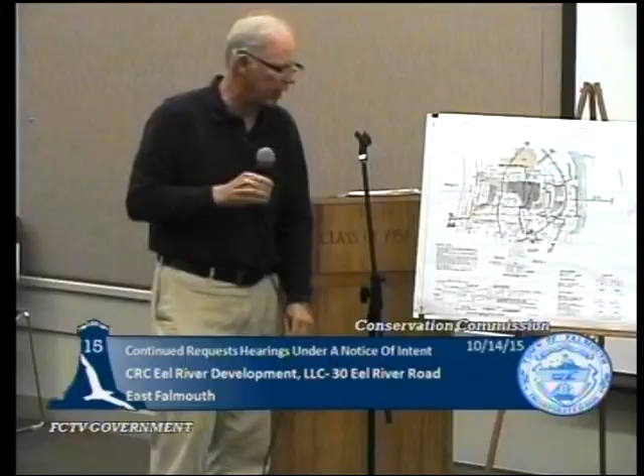I know that Mary, by the way, I'm Jeff Ryther with BSS Design, representing the applicant. Mary had asked me, or made a suggestion, about could that house be moved forward or brought to the road. I guess it could be, but we didn't want to really compete exactly with the house next door.

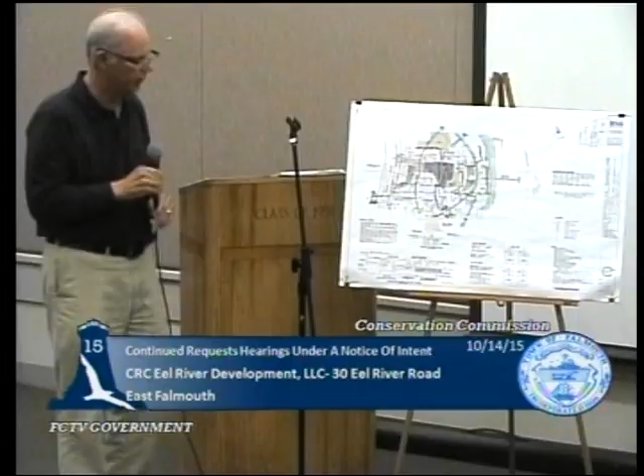As I mentioned before, we're moving that house an entire existing house width, so about 30 feet. We're moving the house towards the road already. I thought that was a pretty good improvement, but I would like to just go over what Jennifer just described.

The coastal bank is one of these coastal banks where you have to apply the 10-to-1 pitch because it's in a flood zone, so it has these little tags that make an awkward little top of coastal bank. But when you offset that, you're offsetting really from these farthest points. So this is the A, the 50-foot, even though it's much more than 50, but 50 at the minimum. And then the next 50 for your A and B buffers.

So what we did is we recalculated the mitigation, and it comes out very similar because now the entire existing house is in the A buffer, but only half the proposed house is in the A buffer. And there is some driveway here that gives credit to the calculation as well. So even though we moved the line 30 feet closer to the road, the calculation is very similar.

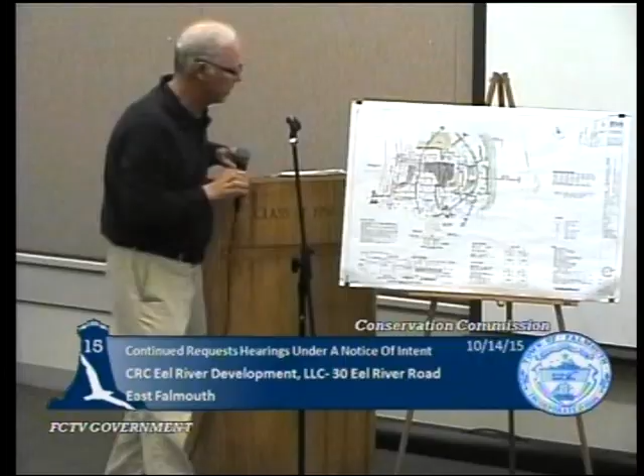There are 4 linden trees that we were proposing to take out right across there, near the limit of work. You'll see them if you look close. Those are no longer to be removed. There's a mimosa tree, I relabeled that, and that is to be removed, and that's down in here.

We talked about the circles around the trees for the buffer shrubs. There was a call out for an existing boat winch that got removed. The owner took it out. It had rotted away, the wood connection, so he didn't need that anyway at the moment.

Talked about the marsh at the ramp. This isn't to be used by anything but smaller boats, such as a skiff, a dinghy, or perhaps a canoe. So there's not a need for backing down big vehicles. This is just access because there's riprap across here, so it leaves a nice opening to get down into the water there.

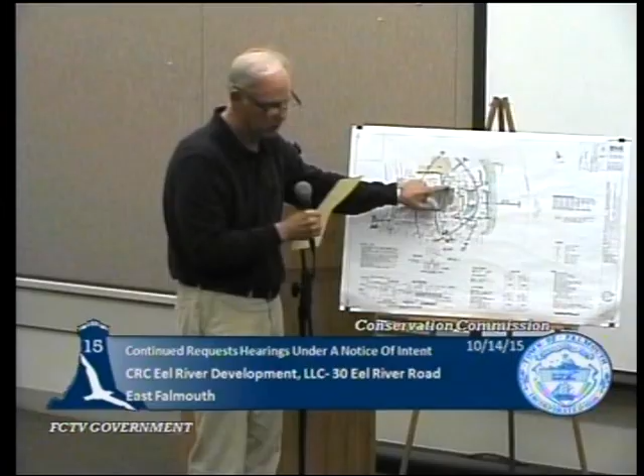We talked about leaving these oak trees. We did have some oak trees that come out in here, and those are no longer to be removed, except there was one oak that we talked about that was going to be too close to the building to save, so we have one there in the A buffer coming out. We were going to continue to the 14th. Here we are today. We just talked about the double oak

and the stone riprap. You asked me to look into the stone riprap for whatever I could find. I did come across 2 documents on the stone riprap.

Back in '73, I don't believe there was a commission like there is today, but the selectmen have the same wetland hearing today as they did in '73. So this is the selectmen's permit.

You can pass it down, or you want it? Well, I want it for the record, but you can pass it down. I have 2 of them. I'll put this in the record and we'll pass that one down. All right, so one down to go to Jen. There's a selectmen's permit for the riprap.

The next page is the applicant back in the day, in '73, had filed with the Division of Waterways, basically asking, do I need a license or not? And their response was, well, the riprap is being built landward of the mean high water, out of jurisdiction, so no, it does not need a Chapter 91 license. So that's the second page of what you got there in your packet.

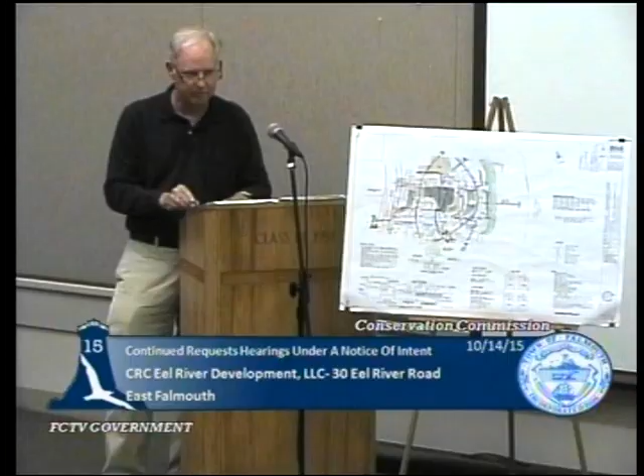All right. Questions or comments? Jen, you got Jeff, something? Do you have that little color-coded schematic? I can give you the last, are you looking for last? No, remember you said I asked you if you were going to bring the color-coded, the little, oh, you don't have like a little 11 by 17? Okay, question. Your AC, no, that's okay.

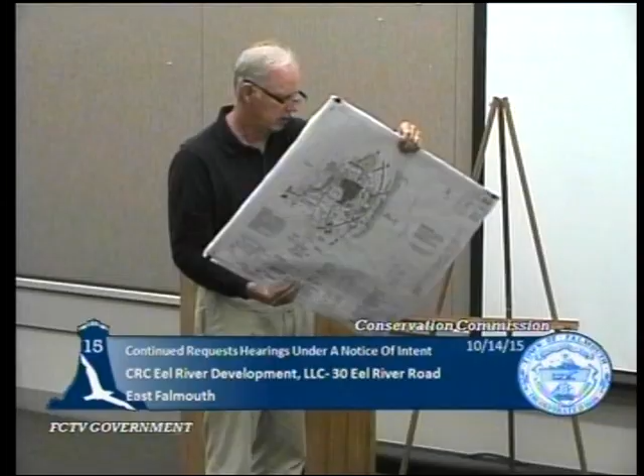Your AC units, were those calculated into your proposed planting? We're going to have to add those in, okay? It only comes up to another 96 square feet of planting. I'm not sure, I think I actually did, but I just moved it into the house. Okay, because they're not shaded, so that's why I asked. Yeah, they're not shaded, but just double check that for me.

Okay. Plus, I am quite a bit over, close to 200, 300 square feet over. Okay, that's the old plan. No, you're about 200. Yeah, a good 200 or so. Okay, over in planting. All right.

And your wall, does it touch mean high water now? No. Okay, good. It comes close over near the boat ramp, but right through here you'll see mean high water, or MHW. Okay, and you can confirm that also on the dock project, it's the same line, okay, it has more elevation.

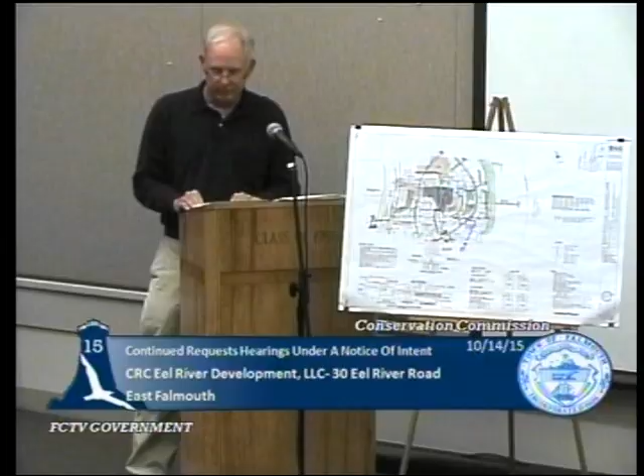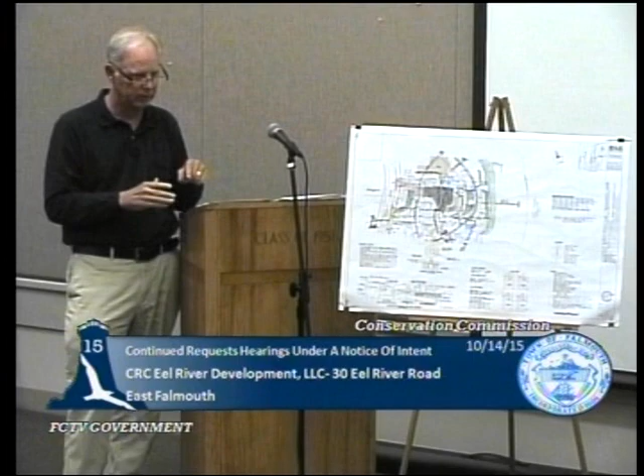Jen? I'm all set. Nancy, anything else? Yeah, well, the other question I had is the tree that you do have to take down, are you mitigating for that? Yes, just so you know, on the seaward side of the existing house, there are over 30 trees that are remaining. And then we are adding 10 more trees, but mostly on the side here, kind of a variety of spaces there. So, yes, you're mitigating for the one you're taking down? Oh yeah. Okay.

Okay, thanks, Jeff. Mary? No questions. Jamie? No questions. Mike?

Maureen? Just two. On your legend, how are you showing your new proposed trees? I'm sure I've seen it. It just says proposed native tree typical of 10. Yeah, there's that shape right there that looks like a pinwheel turnip. Yep, okay, that's what I circled, so I was just making sure. There's 5 on this side and there's 5 on this side. Yep, okay, then I got those right.

And then, just so when we probably deliberate, I'm gonna ask that snow fence be put around these trees and not wrapped around them, because I find that whenever contractors just wrap the snow fence or orange fencing around them, they just keep slamming into them. It'll be set off of them, with 2x4s or posts of some sort to hold it, just so that doesn't blindside you when you get your order.

Usually what they do is put all the fill up against the tree with the snow fence, and also back the equipment into the trees with the snow fence, so it really doesn't protect them. So you want stakes, maybe 3 feet around them, just so the roots don't get impacted and fill doesn't get put up against the trunks. Because it's a tight area in there.

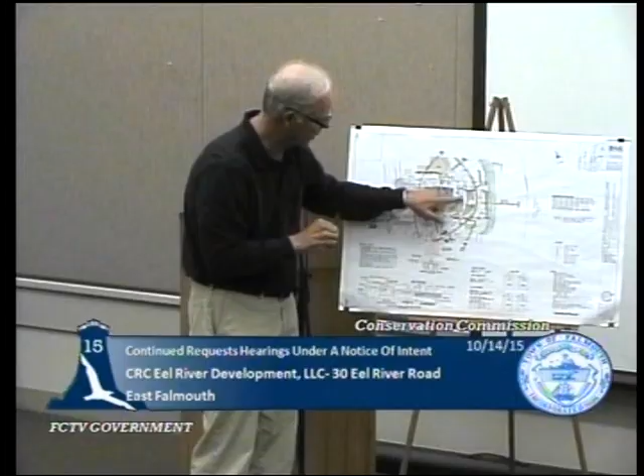One of the reasons we're here is we have to take this house out, so there's gonna be a little bit of disturbance around the house. So certainly we'll have to get those linden trees wrapped.

I mean, that's conditional. But just so they all have to be protected - it's not that, they usually just like to wrap the orange silt fence around it and call it a day.

And that was it, just the oak ledge and that.

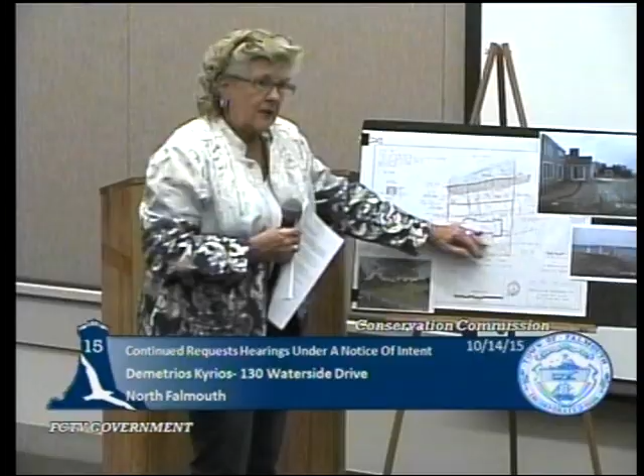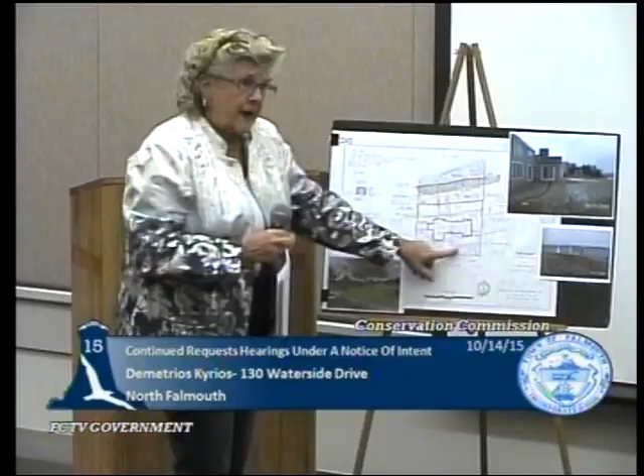The process is pretty simple. We've moved the house back from the top of the coastal bank, and we have reduced the footprint within the buffer zone, the 100-foot buffer, by a total of 2 square feet. We've taken it completely outside of the A buffer, so we no longer have any part of the house or the patio or anything within the A buffer. The septic system meets Title V as well as your regulations for setback, not only to the house, but to the sidelines and to the resource areas. This is pretty much a pretty simple thing.

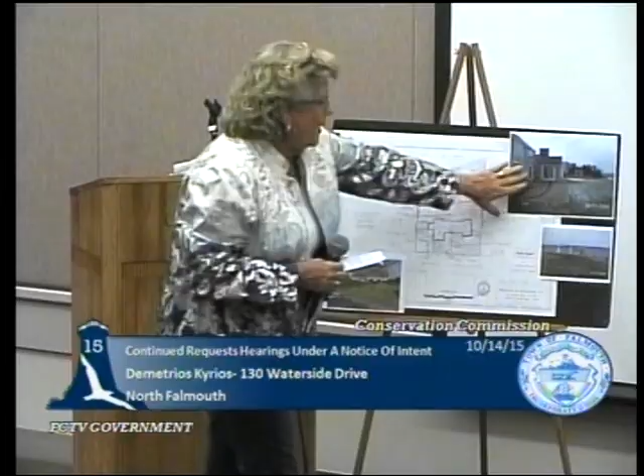I just did this picture here. This is the existing house, but when it's done, the new patio will come to about this point, and the house will be back even farther than what's being shown. And I have my dry well thing.

And I think that's pretty much it. I did give you the schematic that Jen had mentioned earlier in the previous hearing, showing the difference between before and now, and we are including the AC pads in our calculations. So it's pretty simple. If you have any questions, I'll be happy to answer them.

Jen? No, it's fairly straightforward. Okay, Kristen?

Maury? No comments. Mike? No question. Betsy? Oh, Mary?

I assume there's no increase in bedrooms, right? No increase in flow. The system is sized for 4 bedrooms, I think. Don't hold me to that. I can look it up if you want the actuals, but we're not increasing bedrooms.

I have a note on the plan that probably relates to your narrative. It says proposed for 5 bedrooms. Well, then it may be that it's already for 5. But whatever it is, we're not increasing the number of bedrooms.

Okay. And I guess that's all. When I was there and saw the staking, I wondered about maybe pulling back the limit of work a little bit, but I don't have a strong feeling about that.

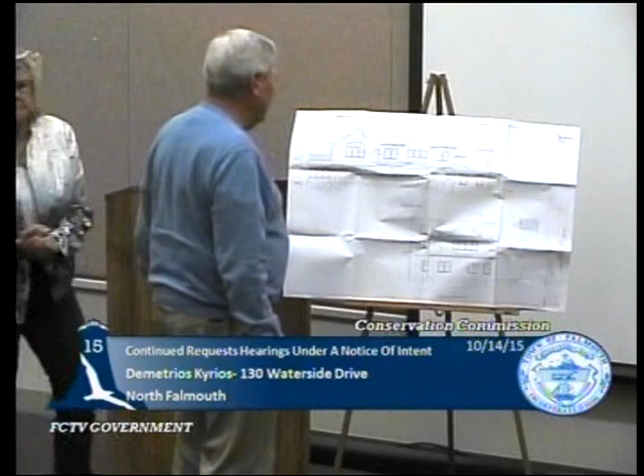Now, how tall is the house, just out of curiosity? Off the top of my head, I don't know if it says. 34? I'm just guessing. I thought 35. Is it 35? I thought it was 32. No, 35.

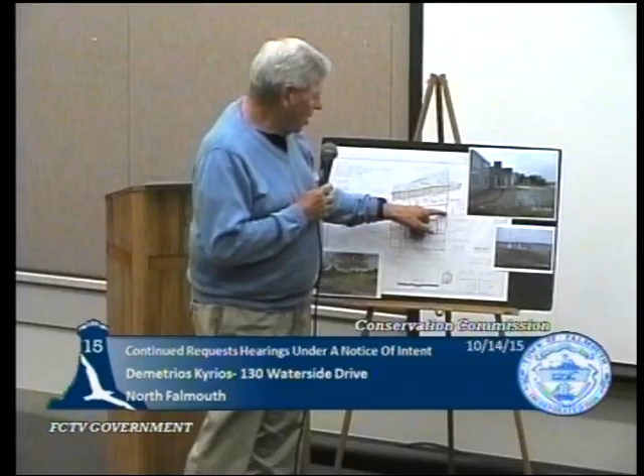Today, there's a lot of shrubbery along this side of the house, not much on this side. There are, I think, Leyland cypress trees out there - excuse me, there's 4 of them, 4 trees. And those things grow very, very large, right?

So I'm looking across the street and I see this side of the house coming out, and I see these huge trees. So basically my view - well, unfortunately, sir, our concern is with impact on the resource area. Views as such are not under our purview, you know what I mean.

But the question I have is, if those trees are removed, can they put other trees in there that don't grow so tall? Only neighbors.

Barbara, are those trees on the neighbor's property? Any trees on this property - and I can confirm where those are - I know you guys hate those trees to begin with. But I've talked to my clients and told them the entire property is in jurisdiction and they can't remove anything other than ornamentals. They've gone out of their way to locate the septic system to keep that big tree in the front yard. They even have someone giving it systemic medicine to keep it going.

They're hand digging the septic system. So I have pretty much browbeaten my clients into the fact that they can't take down any trees on this property unless they come back for a landscape plan in front of you. And any tree removed would require a tree replacement.

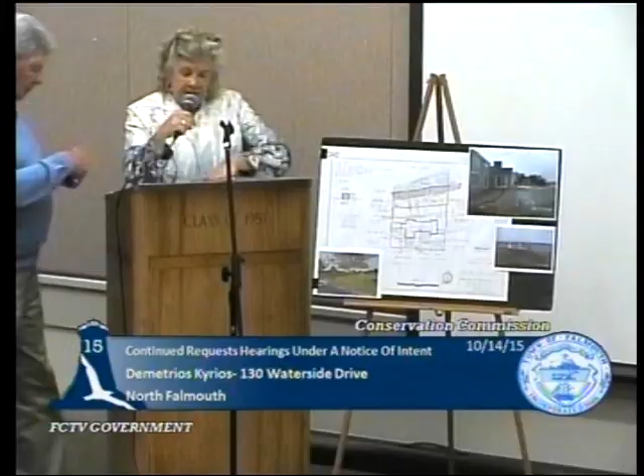Exactly, and the unfortunate thing is, one of the problems for Mr. Kyrios is, if I were to propose - this is a B buffer here, through you, Mr. Chairman - if I were to take down trees in that buffer, they're going to make my client plant them here, and they don't want to do that. You know that they don't. So it can be negotiated.

You can put it to the side so his view isn't impacted, but then it's going to impact the view of the people next door. So he worked very hard to not do anything that would either impact his view or the views of either of his neighbors on either side.

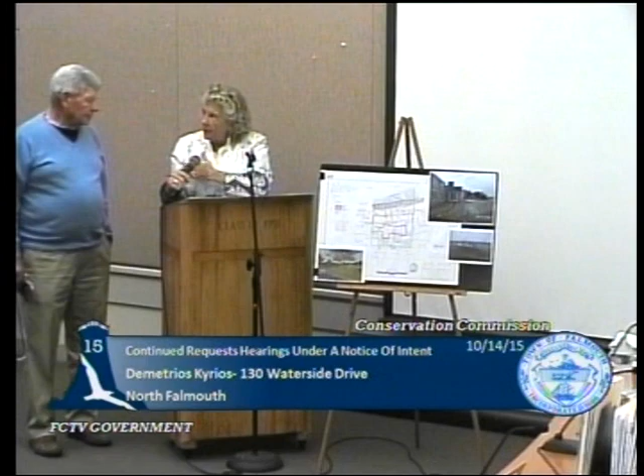So he would have to come back and file, and you would be notified as an abutter if he does any landscaping. I have a question about those trees. Ma'am, you're going to have to go to the microphone. Thank you.

Those trees look like... Your name? Oh, Nancy Manning. I live across the street. Okay, thank you.

Those trees look like they're dying right now, they've all turned brown. If those trees had to be taken down, would they be able to plant a different tree? Because why would they put the same tree up if it's just going to die again? I don't understand - somebody mentioned they'd have to put the exact same tree up.

Well, they had to come back to us anyway, and I'm sure it could be discussed. It's going to be a tree, but Leyland's are not necessarily the native species. I understand that, but it's going to be a tree - it doesn't have to be the exact same tree. No, it does not have to be a Leyland cypress, probably a cedar, or an oak, or a white pine that grow just as big, ma'am.

Well, I don't know. Any other comments or questions?

Thank you very much. Okay, what's the pleasure of the board? Move to close the hearing and take it under advisement.

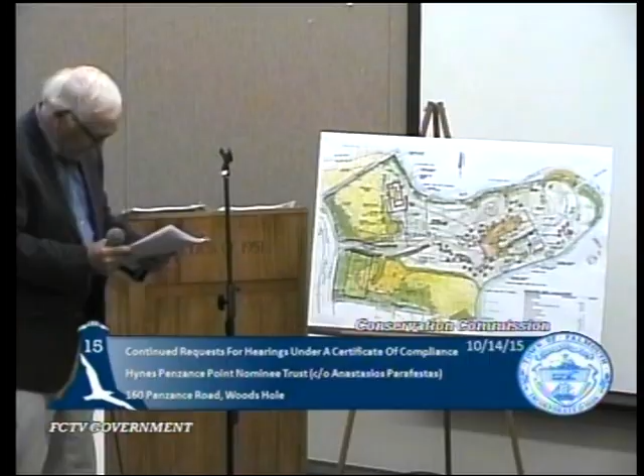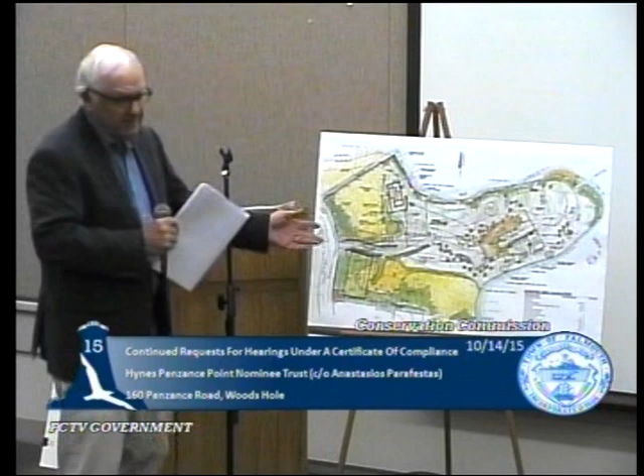13,809 square feet. The original plan showed a buffer here, and then there's another buffer. There's a colored exhibit in your package that shows the other resource area buffer. So we believe this is an appropriate replication.

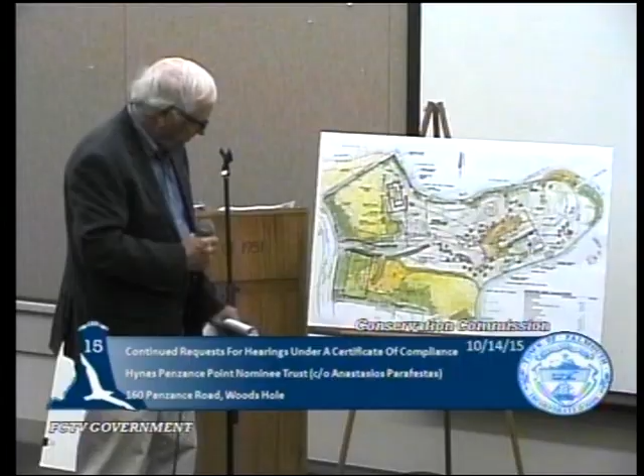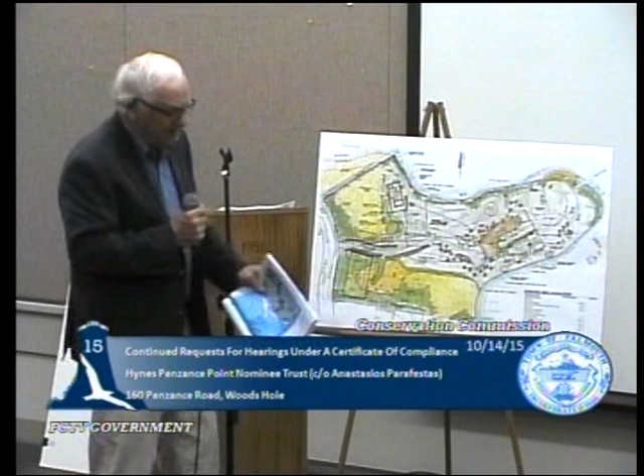We also filed, as an attachment to the letter, pointing out that the shape of this creates a wildlife corridor that runs continually, and it goes diagonally across the road here, and then it also connects all of this. So we showed that on an aerial photograph. We marked it up because we think this is a significant linkage.

And Mike, just to clarify, the buffer you were talking about in the area of the tennis court, that's to comply with 25-1884, as agreed upon in the original restoration plan back in 2005. That's right. Thank you.

So I believe that this replication buffer and the wetland buffer is appropriate. Before, you heard testimony from Mark Manganello about the procedure described by LEC. It's been several months—do you want him to quickly recap what he described before? Yes, that'd be a good idea.

Mark, do you have a revised plan? Yes, the back page—there's no revision plan says, so it's the one dated August 18th. Is that the right date, August 18th? We have August 18th. Yeah, I think that's it. Has to be, I just want to make sure. That's the only one.

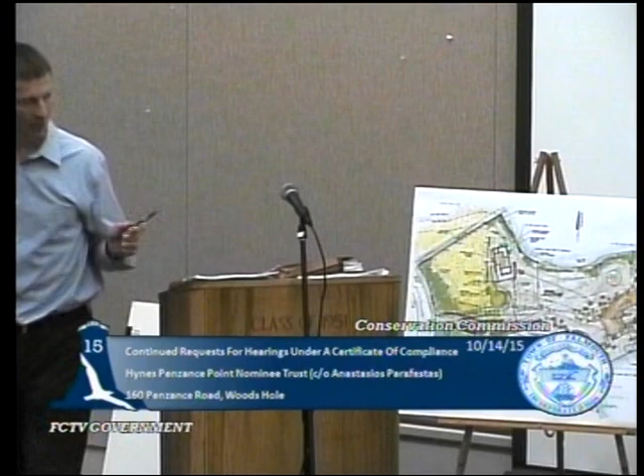Yeah, and I'm still unclear—does this 13,809 square feet include any area that has invasives growing, woody invasives growing now? The 13,000 number that Mike just mentioned, yes. So you're saying that some of your restoration is actually already areas vegetated with woody vegetation, although it's invasive?

Yes, and actually that was the main subject of my testimony at the last hearing—that I acknowledged these areas are vegetated but dominated by non-native invasive species, and acknowledged that they do provide some habitat value, of course, but that the proposed improvement with natural vegetation is a significant improvement to not only the buffer but also the adjacent resource area.

Well, Betsy, I think you need to let Mark make his presentation. Mark, didn't you take that off your plan, what you just said? Parts of it we did. Okay, and then the only part that would have been to the north of the driveway is where the existing driveway is, other than the hedgerow in front—right here, all in front of the tennis court. Yeah, there's a strip, it is right here.

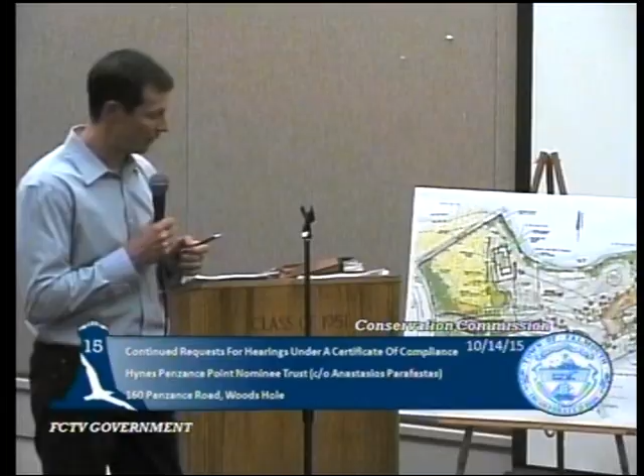Correct. Okay, and you're aware of the fact that we normally don't allow people—we'd love to have you replace invasives with natural vegetation, but we don't give credit for that as mitigation planting. I had heard that. Okay, yes, I was aware of that.

It sounds like mitigation to me. It's improving on a situation that's degraded. And so, if that's the practice of the commission, it is what it is. In many other communities, we've successfully argued that that's a significant improvement to the buffer zone, and I think in this case it is as well. I think it'll be an improvement. I just don't agree that it serves as mitigation.

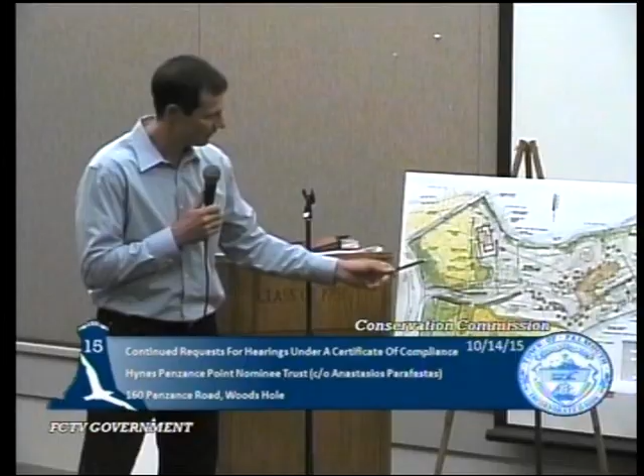We eliminated the same type of proposal from this area. Most of the restoration is in the existing tennis court area or its existing lawn area, with the exception of the area we just discussed. That was really the nuts and bolts of it. I did speak to square footages and some other facts about the case in the context of the history of the site, but most of that has been modified since then, and Mike's most recent document summarizes that accurately at this point, in my opinion.

Anything else, Mike, on this? I have one question, Jen. Mark, I think I requested at the last hearing, and in my multiple meetings with Mr. McGrath, that the Virginia rose come out of the wetland plantings. You have both a wetland and an upland planting, and I would like to see something else besides the Virginia rose in the wetland restoration area.

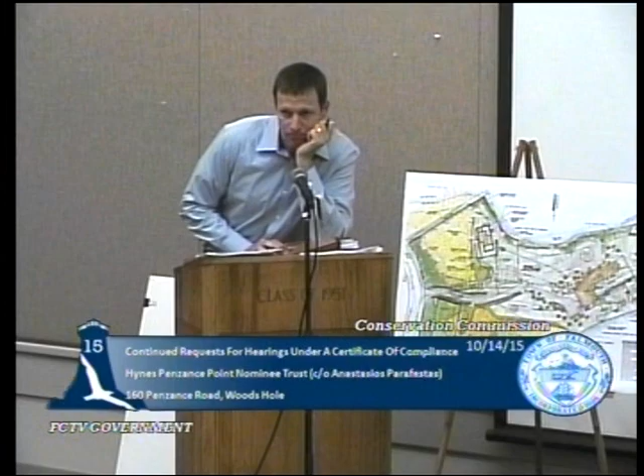Okay, we're certainly open to making a change on the plant list. And bearberry as well, that'll have to change too, you have 164 bearberry.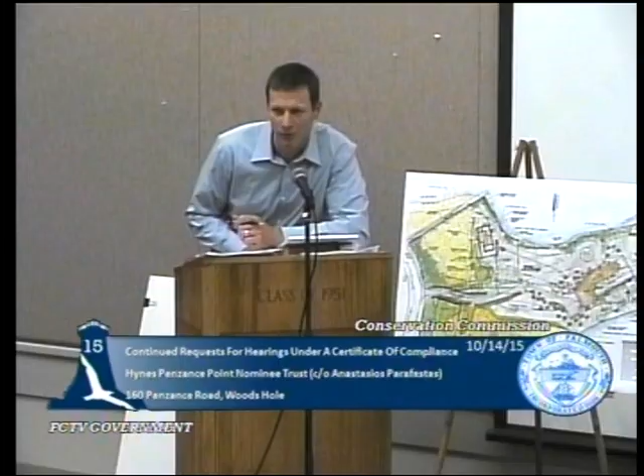Those are concentrated in the area around the geothermal well, so it's kind of hard to see in this area. It looks much nicer in color, trust me. That was to maintain something quasi-path-like. Okay, all right, I see it now.

And you're excavating to a depth of 2.8, so your finished grades? Yep, I mean, there would certainly need to be construction oversight by a wetland scientist to keep an eye on the underlying soil characteristics and make sure that the target elevation actually matches what you see in the soil profile in terms of evidence of wetland hydrology.

That's all for right now for Mark's presentation. I understand what he's proposing.

Okay, Mary? This is a little unfair to ask on the spot, but can you estimate the square footage of this area that Betsy was concerned about, to the west of the tennis court? It's the area that has invasives. It's under 700, I just worked it out. It's about 10 feet wide and a little over, but it curves down, and it's about 70 feet long, so give or take on either end it's 700.

So, do you need about scale, Mark? You want to check my numbers, 5%? Is that right? Sure, yeah, there you go, 5% of the total. That's all I have, thanks, I just wanted some perspective on that. Yeah, it's just north of that area. You all set, Lena? Yeah, so call it 5%, all right.

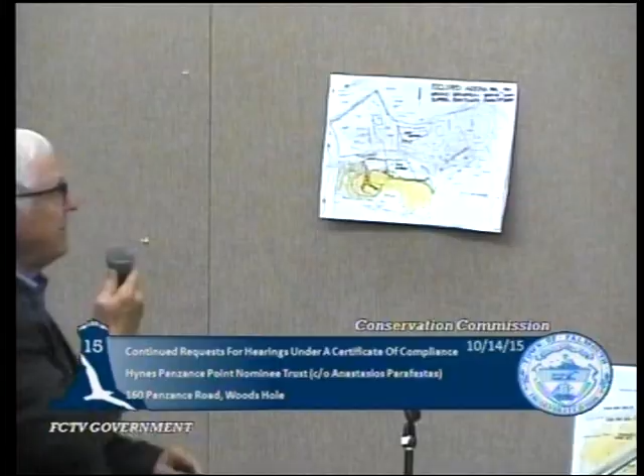This green, which is quite different than that green, and that green is the buffer plantings that are required. Correct, but you change it up as you go. No, I didn't, I used the same texture and color every time I colored. Oh, you're such a good crayoner.

This is the exact same green as the one I colored, same colors throughout. The Xerox machine doesn't always reflect it well, but the point was to show all of the resource area buffers, the old wetland, and the different colors for the restorations.

I'll continue with the last plan, but it does get very busy, no question. Let me just clarify this point.

If you've been to the site, there's a row of specimen conifers that act as a visual buffer between the Hynes parcel and this parcel, and there's a grass strip here as well.

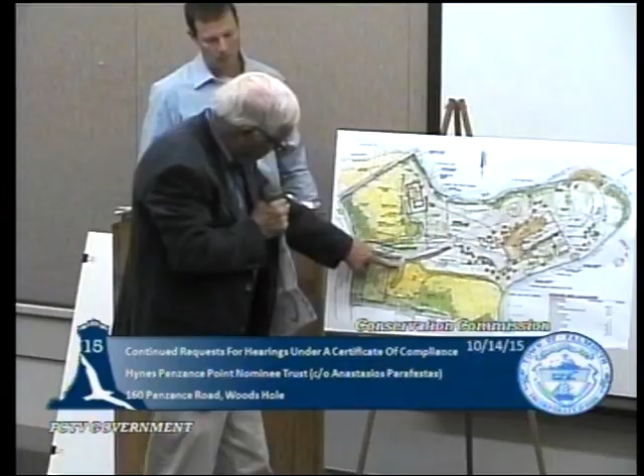So what I described is that green area is the same area as was described in the 2005 plan that you approved in 2009. Thank you, that was important.

Thank you, Kristen? Well, I haven't been part of the start of this, so I'll hold my comments. Not a problem, a very unfair question to ask poor Kristen, jumping into the middle of this project.

I do have another question, from the attorney's letter I just got today. I want to make sure we're mitigating from what this says, just to be clear. Let me follow along, this is his letter, the first paragraph.

I had a question about the two owners for two properties, and how mitigation is going to be handled given there's enforcement involved. I just don't understand how we have two different owners, two different properties, and mitigation on two different lots.

Don't use the word mitigation, use restoration. The restoration is going to be entirely on lot 160, correct me if I'm wrong, Chip. That's all I wanted to know. No, it's all we're looking for is credit for things on lot one.

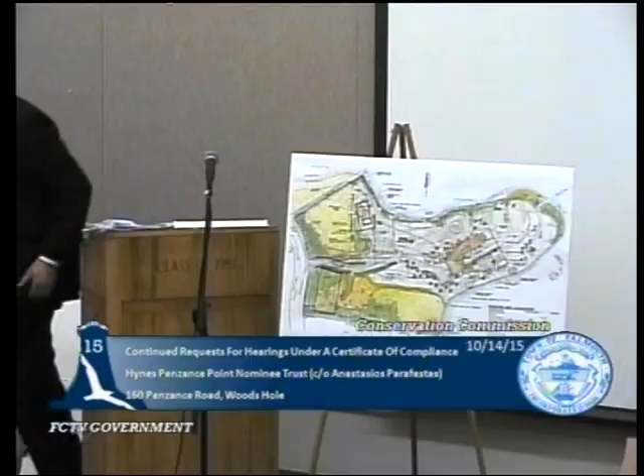And the requirement under 1884 that was rolled into the restoration plan in 2005 is also entirely on 160. It's just confusing because of the driveway shifting. Okay, I'm clear now, thank you. All right, any other questions or comments from the commission?

I hate to tell you, but I'm still confused. Where you asked what the size of that is, that looks like more than 5%, maybe 25% or 20%. It's roughly around 700 square feet.

But look at it relative to where the restoration area is, it looks like more than 5%, maybe more than 10%. You have a triangle section of the restoration area here, that's part of the total.

I think it looks kind of like 10%, but she says 5% and she calculated it. Out of 14,000, maybe 13,000? It's just right around 5%, right?

What did I do with my scale? It's a little under. Oh okay, you can use it for a minute. The other measurement is actually right, about 20 feet, well I mean 5. But anyway, we can't start getting into checking their measurements.

All right, you all set, Betsy? Do you understand, Beth? Yeah, I understand all the way along, I'm just looking at what the proportions I see there.

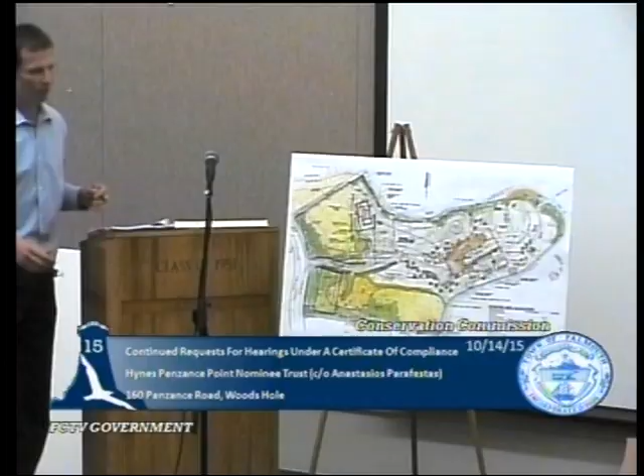I don't believe it fits that same definition. This is an area that was historically disturbed. It's for the mitigation for the construction of the house addition that was put onto the seawall project, so this board could grant occupancy for the house. The mitigation was tied into the house construction—the applicant wanted occupancy. The commission was nice enough to transfer that requirement to DEP number 251884, and that's why it's there. So it is mitigation for a project done way before my time, but now it's being restored.

But it's mitigation though, Chip. So it was mitigation, but now it's being restored. Mitigation is a requirement. They wanted to put a house addition on, and were required to put the mitigation in. They did not do it in accordance with the order of conditions, which is why it was put into the original restoration plan for the disturbed wetland. We wrapped the old compliance issues into that, as well as replicating or restoring the old wetlands. So no, it is not restoration, Attorney Nyland, I'm going to have to disagree with you on that. It was a requirement of an order years ago. Right, it does fit the definition of mitigation. So I was wrong about that, but it is, in a broader context, restoration of a historically disturbed buffer area. That's my point, I'm just clarifying it for them.

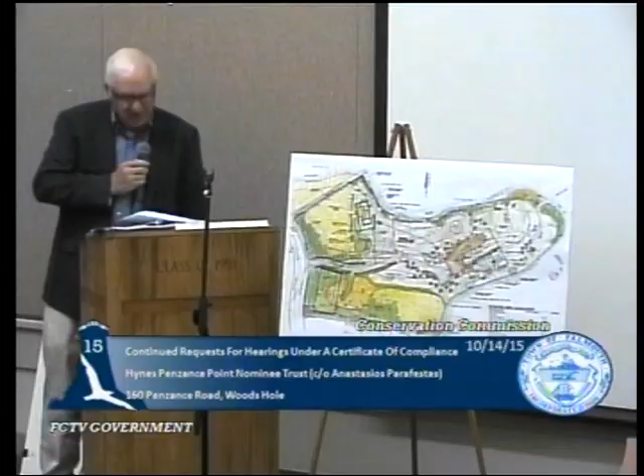Mr. Chairman, this strip of land is a very large hedge. Your definition talks about a naturally vegetated buffer, so when I look at a hedge, I don't consider that to be a naturally vegetated buffer. It's not natural. We were just told it's a complex of invasives, mostly privet, but unfortunately overgrown, I call it an overgrown hedge. That's a hedge.

All right, are we ready to do something here? You guys ready? So the quorum for this vote is Jamie, Mary, Russ, Mike, and Maury. But you're closing it and taking it under advisement. I know, but they're taking the vote to close it, so I'm just saying who can vote. All right, all those in favor say aye. Aye. All those opposed, no. Abstentions, unanimous, so moved.

Okay, now we'll move on to the Notice of Intent, on table. Would we second? Mike made a motion to untable, Betsy seconded. All those in favor say aye. Aye. All those opposed, no. Abstentions, unanimous, so moved.

It's hard to know what to unfold, there's so much room. Mr. Chairman, may I interrupt for a sec? A couple of you, your hearing was closed, so you're welcome to stay. Oh, Leo, I didn't see you come in. I'm sorry, we finished your hearing long ago. Oh, RDA? No, it was the Eel Pond. Yeah, he was Eel River. Eel River, yeah, oh. Good, Mike. I didn't realize we cut in front of somebody. No, you didn't. It was closed, he came late, he arrived. We're just trying to help speed them, don't have to hang around tonight. All right.

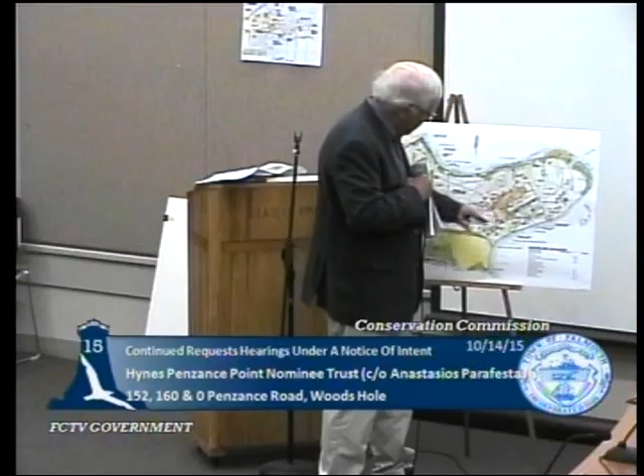I don't know if you've been to the site, but underneath this arch, this arc-like structure is actually a cantilevered porch, but underneath it there is a door, and in that same storm event, water came through the door. So this proposes a stone wall, with 4 steps up and 4 steps down. We talked about this before, but it's been so long. The other thing that's slightly different than what we proposed before was that we had shown

an impervious area right in here, but what actually happens is that this floor is the same elevation as the porch. The thought was that people using this spa, which we've called a pool, instead of coming into the formal room, they could come into the covered porch. So all this does is create a flat terrace set at the elevation of the finished floor, and it's actually going to be slightly taller than what exists today.

Over here, there's going to be a terrace outside this door, and this is what we've been labeling as a pool, but it's really like a spa. He has a design of it, with steps to sit in, at an elevation higher than this ground. There's an extension of the wall all the way around, and this is a terrace.

The notice of intent is signed by both trusts, and there's also, on 152, he's going to make this house significantly smaller.

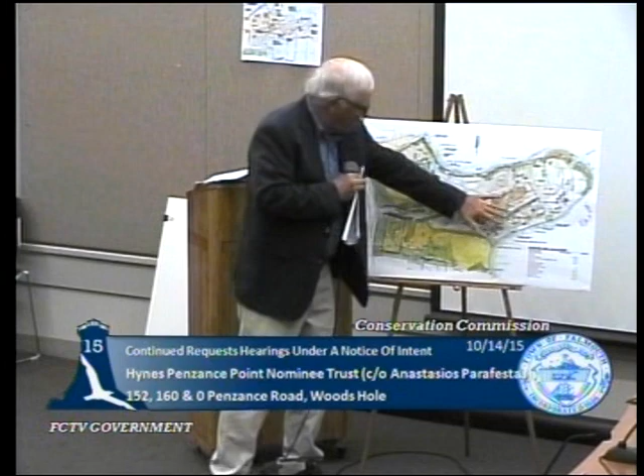So we filed one notice that described all of the activities on the site, including the replication and restoration. The staff has suggested that you want this constructed first, and we've agreed with that. Constructed meaning it's graded, the plants are installed under LEC's approval, and only when the commission inspects it can we then go forward with the other work.

Additionally, there's been a change in that when we were at the site, the salt marsh has grown sort of dramatically. So the plans you have show the existing salt marsh.

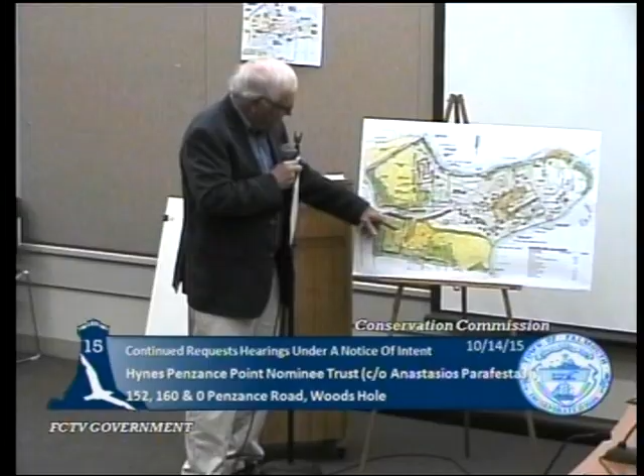The driveway route was changed slightly, not a lot. During the first hearings, it was pointed out that this ground felt soggy. It turns out they were irrigating, so I had them shut off the irrigation. I went back in a week and it was much firmer than it was before. So I did adjust it slightly, but not that you would see it's 2 or 3 feet different than this location. The whole design of this is that the owner is saying that if he's going to spend this kind of money, he wants to get privacy.

So no matter where you are in this point, once you build this driveway and construct these hedges, you will not see his house. He wants more privacy than what he has right now. Right now you can see the house, you can tell if he's there, and he doesn't want that anymore. So the whole point of designing this curve was to provide the privacy.

I described before that this is elevated higher than the driveway is today. If you've been there after a rainstorm, there's puddles in here, and this is elevation 5 versus I think that's elevation 4 there. I'm not worried about settlement because I've dealt with some very soft soils someplace south on Penzance, and we managed to deal with that without any adverse consequences.

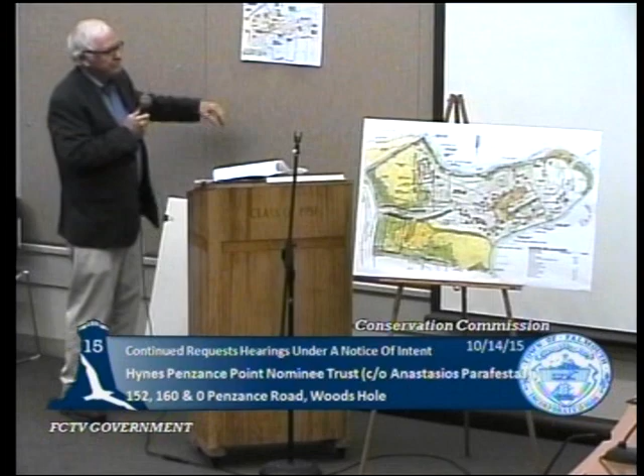Now, impervious areas. You have a chart like this. I don't know if you can see the chart. Why don't we take that off for the moment so we don't have to deal with it. That's this one? Great.

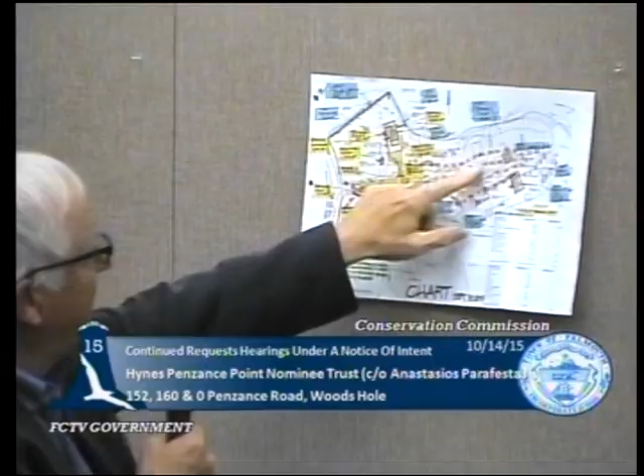The one thing I've done is indicated resource area A and resource area B, and the entire site is basically resource area. Only 3% of its entire land is outside the resource area buffer. So we have a very unique site with an awful lot of wetland resources.

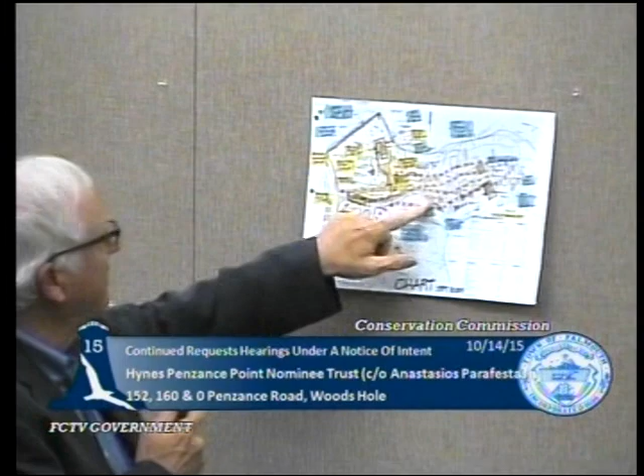What I did here is color-code this to try and depict the changes. The brown shows increases in impervious areas, and the yellow shows decreases in impervious areas. I also calculated the area in the different zones.

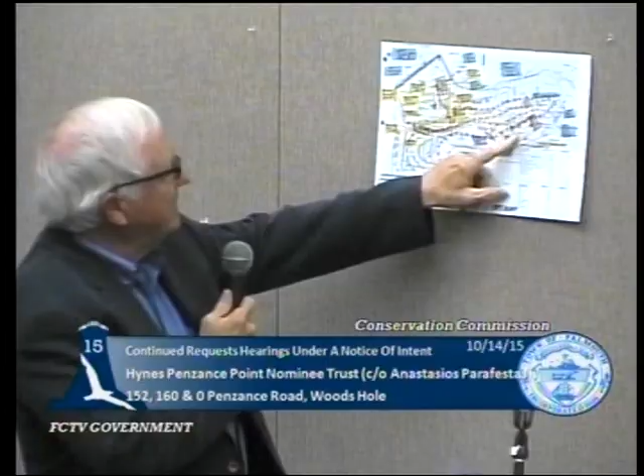We start here, there's 490 square feet in B, then stairs over here, 42 square feet in A. The pool and terraces, 1,250 square feet in A and 222 square feet in B. The walls and this wall and those stairs to protect this house from the floodwaters is 175 square feet.

There's 38 square feet in A and 98 square feet in B here. The driveway is 1,554 square feet in A and 849 square feet in B.

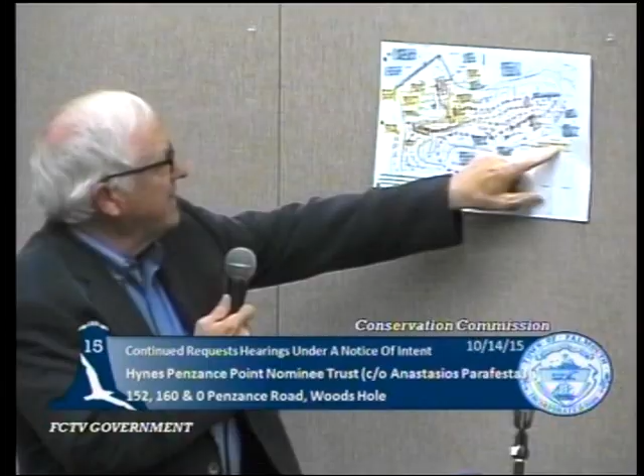For the reductions, there's slight removals at the two round flagstone landings if you go out to the site. He's going to take those out. He's going to remove this house - 1,958 square feet - and put back 1,040 square feet.

He's going to add some stairs here so that you can walk down from the upland right down onto the beach. That's an additional 56 square feet.

We added a wall here. I found that there is a discernible and continuous wall to some point here, then there's a discernible wall here. I went down with a probe and found that this wall was basically sunk, so there is a continuous wall there. The former owner told us that wall was continuous, and a portion of it has sunk.

The new design shows it to be supported by small mini pilings. So we have a removal of a walkway here - there's a little 4-foot walkway that we're replacing with a 3-foot walkway.

There's a portion of these stairs that's over the historic water line. This house is one of the first houses that ever got a Chapter 91 license because it was built over the historic water line of 1898. So we're going to remove the portions of the house that are over the historic water lines.

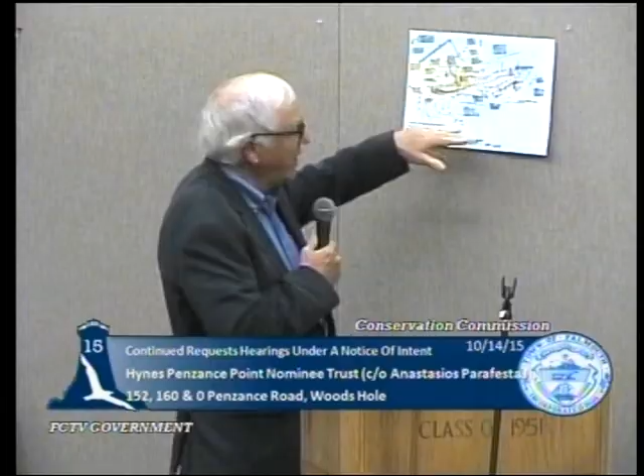So there are easement rights from this trust over 160, so they are linked. I still say you should be looking at the entire shape of this parcel when you consider it, especially since this is very valuable land. The town GIS lists 160 as $8.4 million, and the assessed valuation for 152 Penzance Road is $3.9 million.

I've left off, I've rounded up to the nearest 100,000. All around the frontage of 160 is an impervious concrete wall, and this is a solid barrier, and it stabilized the landform.

Jennifer called me Friday and said that she didn't think we could satisfy the requirements of 1018, which basically says you cannot increase impervious area any landward of, it's called the present primary structure. So I would ask the commission to consider my testimony now concerning that.

You don't have a definition of present primary structure. I went out and I looked at this joint right here, and the stones that make up the walls are interwoven.

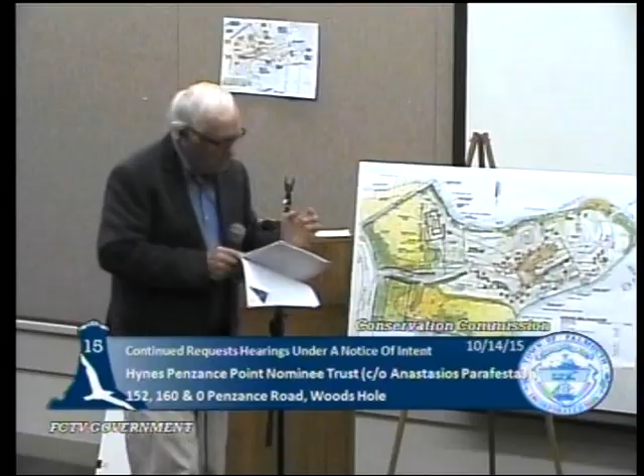When I look at the rust that is shown on the photographs from 1996, they're currently not that rusty at the moment. The movement of iron in the groundwater is a telltale sign that denitrification has occurred upstream, in this case under this wetland.

When the Pilgrims came to New England, they made tools, and the way they made tools was they harvested bog iron. I discovered bog iron in Quissett when there was an erosion event several years ago—I think it was the Halloween storm—and we found bog iron. I've also created iron in a place I didn't want iron, so I know all about iron.

When you have highly anaerobic conditions, the bacteria will actually release iron in the soils. It'll move to the point where it reaches an aerobic, oxygen environment, and then it will turn to rust. So right now this rust is not obvious, but it's been obvious in the past. If you look in the bottom here, there's a faint streak of rust all along, most likely from this fluid moving in this direction. There's no question there's iron there.

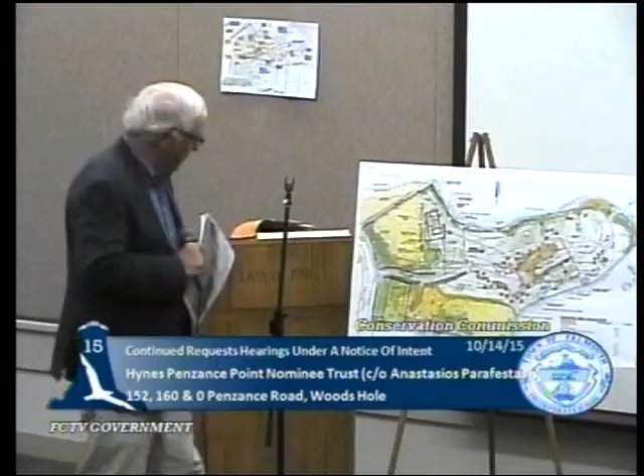There's a paper that's pretty fascinating about movement of iron in groundwater in Waquoit by a scientist named Charette. So the combination of systems here—we have an impervious wall, and basically a circumstance where there's substantial treatment for the runoff that's coming here. I believe that we have created a very good system to protect the waters of Great Harbor.

If you think about nitrogen, there's two sources: surface runoff, which is dissolved organic, and then inorganic that's in the groundwater. I think between the combination of the various things here, there's very little inorganic nitrogen that seems to be reaching the waters of this harbor. If you walk around this, it's a sandy bottom—there's no indication, like I often see, of any kind of nutrient runoff.

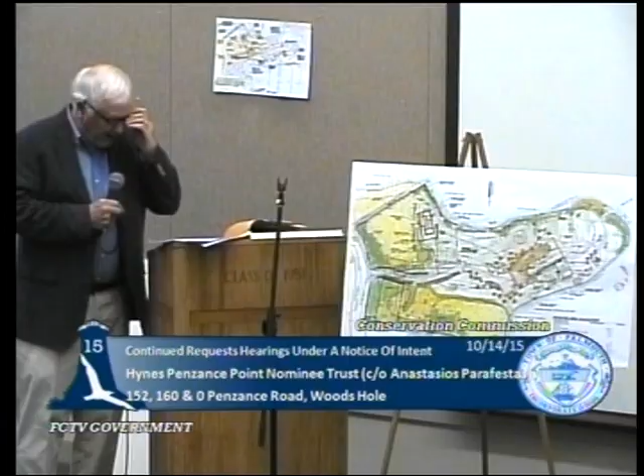So I believe also that the purpose of your buffer is to prevent nutrients from reaching the wetland. In reality, in my opinion, it should be about nutrients reaching the estuaries. But in any case, I believe we've created a circumstance where we don't have to worry about the nutrients. Obviously there's going to be no erosion or sedimentation into Great Harbor from this side, and the seawall itself protects the landform.

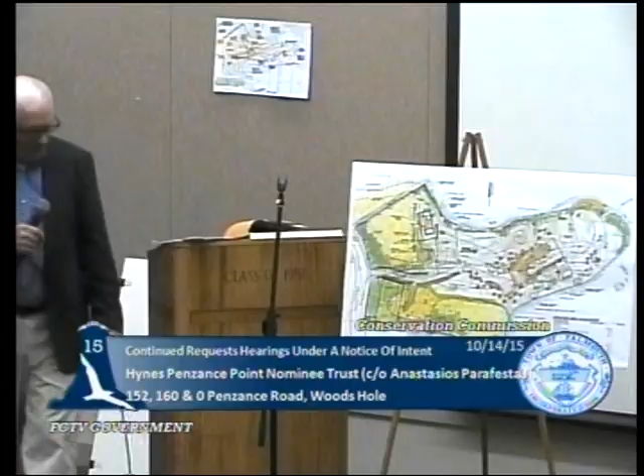I can't help but think—I have a photograph of the seawall. I'm not sure everybody knows, but this seawall is a very substantial structure. I have a couple of photographs of the seawall. I only have a couple, but you've all been there, I'm sure. Here's another one.

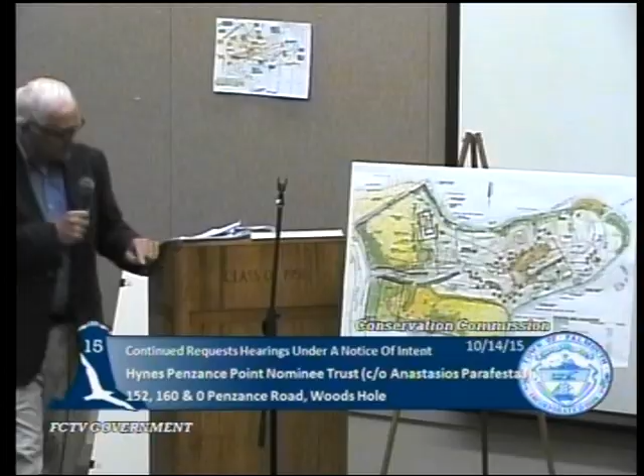So I'm saying that's a very newly pointed wall—that was already totally new. So I believe that when you look at this, you could come to a conclusion that the construction of this impervious area, in an area that's covered with landscaping and lawn, is not going to have an adverse impact on the water quality of Great Harbor.

In the original filing, I also gave you a nitrogen loading calculation using the Cape Cod Commission model. For the final discharge I used 25. The board, for existing conditions, used 60 for this—most likely it's 80, since the raw nitrogen in residential septic systems is 80. I used 60 because I didn't have any data; I basically split it and just made it 60.

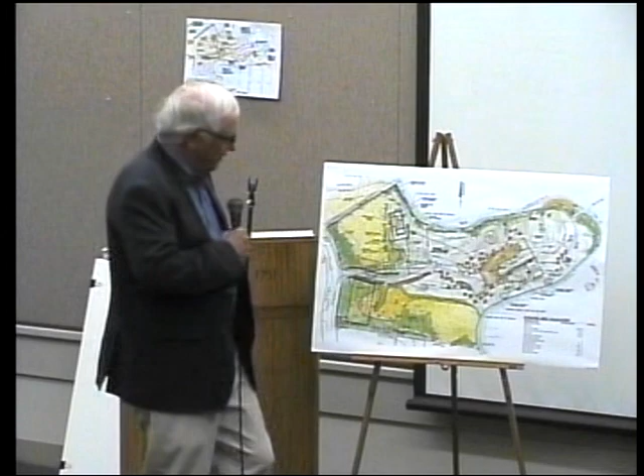I also thought there might be old plumbing here, but in any case there are two cesspools here, and obviously we're doing away with them. When I did the existing nitrogen loading versus the proposed, we're reducing the nitrogen load significantly. I believe that if you look at the entire project, this is obviously a much better project—I think we've improved everything.

On the last page I put a summary of all the positives, the benefits of the project. Obviously, we filed voluntarily to fix the unresolved issues on the site. We've demonstrated clearly a willingness to meet with the commission.

We've met with the staff several times, we've met with the commission, so I believe we've been responsive. We've applied to replicate the altered wetlands all on lot 160, as you asked. We filed to restore and enhance wooded buffers all on site. We've shown that we're reducing the actual nitrogen load into Great Harbor by removing a 3-bedroom house, replacing it with a 1-bedroom house, and reducing the volume of the septic wastewater.

We filed plans with the Board of Health to improve the performance of the septic system and to connect the new buildings. We're adding a MicroFAST to the system, which will increase its performance. We have lowered the entire nitrogen load by one-third.

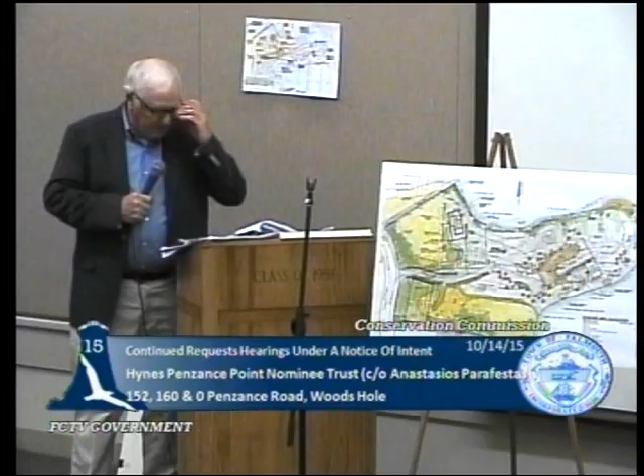We have reduced the total impervious area of the entire site. We have removed cesspools, which were causing potential bacterial contamination, and replaced the 152 structure with a smaller structure that does not encroach over mean high water.

I forgot to describe one of the changes more completely. The current floodplain shows this at elevation 17. We originally proposed to elevate the structure, but when the trust came to realize that the finished floor was going to be 15 feet in the air, they thought that was an extraordinarily ugly result.

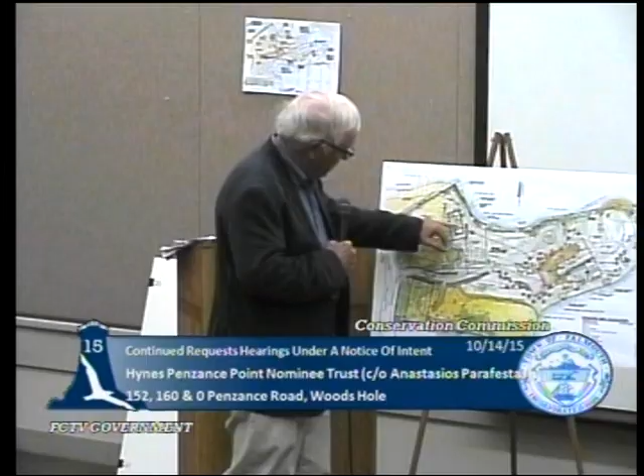So they've proposed to reduce the building, and this assessed valuation is almost $1 million. So they're going to basically only spend half the market value on that, and use the existing finished floor. There is a proposal to reduce this floodplain, but the lowest we could get was 14.

Across the harbor, for instance, the 100-year floodplain in the middle water is 11, and then it's 12 at the fisheries. I have no idea how it could be 17, but so be it.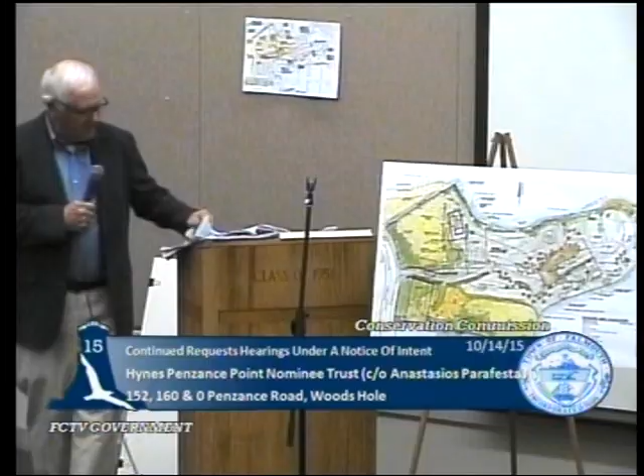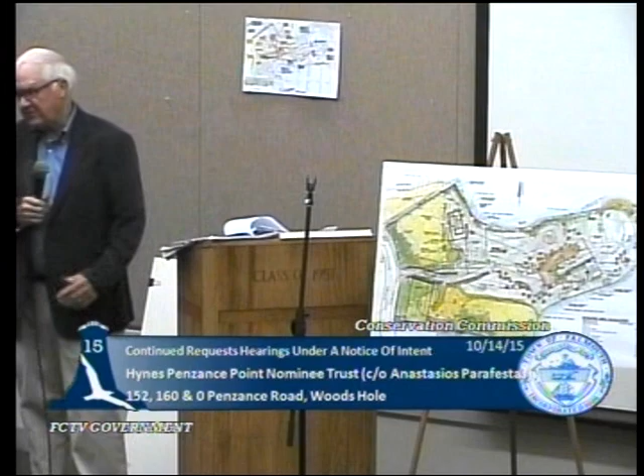I believe that if you consider everything we're doing, we've worked hard to try and get this to a point where you would understand and have a project you could approve. Mark's here to answer any questions, as well as Mr. Nyland, especially about the fact that we filed with one application, while it's under two different trusts — obviously they're cooperating together. So we hope that you will approve the project.

Jen? Okay, just a few things.

Just a recap — Mike did an excellent job describing what they want to do. The pool and spa area is new, the walls are new. A couple of things the board will have to consider when you deliberate: whether the case has been made that those walls are part of the original foundation of the house and therefore constitute the present primary structure, or if that is exceeding it, since it's been in the regulations since 2008.

And the fact that the global concept of this property, or this peninsula, is to use the reduction of 152 — the impervious reduction of 152 — and apply it to 160.

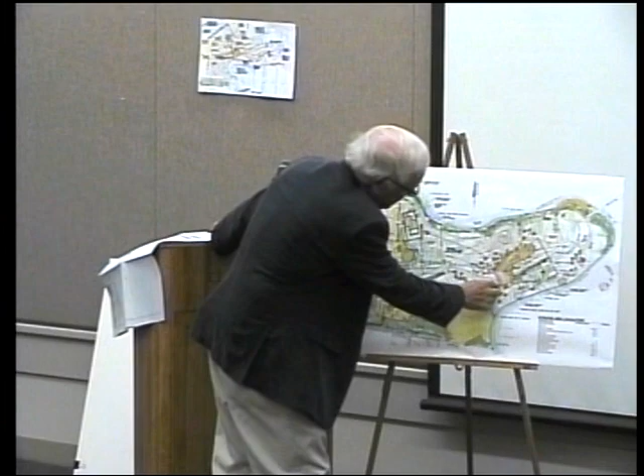So, Mike, you pretty much thoroughly covered it. Although I thought at the last meeting you and I had, they weren't going to do the little finger projection. They took that off the table. But the filling in of that other little wetland area on 152 — so that's back on? I could have sworn last week you said it was off.

The trust would like you to approve this if you can see a way, because he believes that this is equal to that, and this makes a much better wetland than the finger-like projection. I could suggest a different route and still have a sweep.

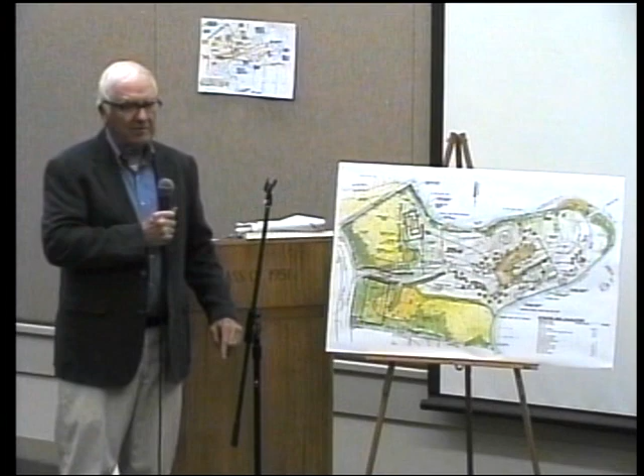Okay, all right. No, you're not on the quorum, so does the board have any... that's all I have to say. I don't have any questions.

I'm very, very familiar with this project and what is being done, what is being proposed, and what is being calculated. So just to recap, it's swapping of the impervious surfaces from 152 to 160, the moving closer to the primary structure, the connection of the septic, Mike, and that little piece of buffer up in there, and then all the removal of the impervious surface on 152.

Okay, I have no other questions, Mr. Chairman. Mike? Oh, and the moving of the driveway. And this is, it's all around the driveway, for the first question.

Where is the water line coming into this building, coming to this property? I don't know, I believe it's under the... I believe that the utilities are... So are you going to construct a wetland replication area on top of the driveway, on top of the water line?

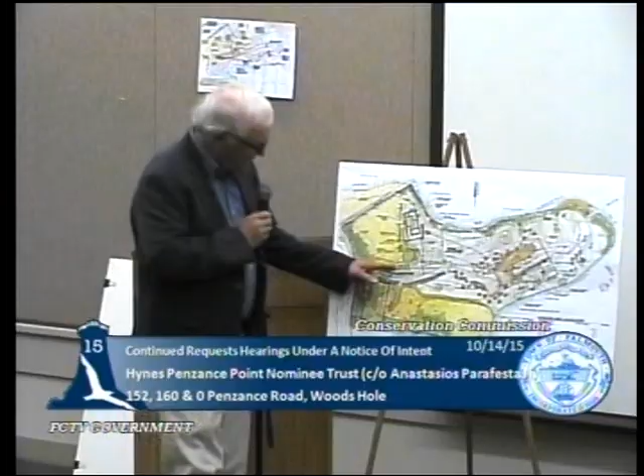So you're going to be coming back to us in the future to tear out the bush and put in the water line? I mean, if that's what we're doing, I just want to know. If you don't think the utilities ought to be under that, then we'll move the utilities.

Well, now you're back to my other point. You're going to move the utility into a road that's likely to subside because you're adding fill to make it come in. I mean...

Let me ask you more. This little area you're filling, what's the purpose of that filling?

Mike, there's a little bit of an emotional touch here in that all this came about because someone was filling a wetland, and now you're coming in and telling me you want to fill in a wetland. It doesn't, it just, I have an emotional, not an intellectual response to that. Now, why are we doing this?

Well, if the commission doesn't want that shown on the plan, I'll submit revised plans to take it off. No, Mike, about... I said a good 70% of the projects come before us, I look at them and I go, good idea.

About 15%, somebody comes in and they have this much better idea than I would have had, and I say wow. And there's about 15% of the projects come before us where I look at it and I go, what the hell is this? And if it doesn't hurt, it doesn't hurt. I mean, let it be in the 15% and be there.

But there's a history on this project, and I get this awful feeling that there's something going on that I don't understand. And before I raise my hand and say yes, I'd like to know what that something is.

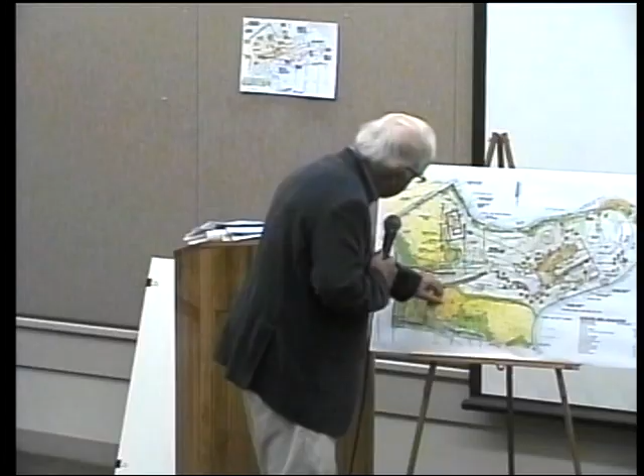Okay, are you removing any lawn anywhere on these 2 sites to create a buffer along the edge of the Great Harbor? Yes, because there's lawn in here. I'm not talking about that, I'm talking about 152 and 160.

Yes. Keep the notice of intent part separate from the certificate of compliance part. I don't want to see that. The compliance is over with, that's below us now. There's some incidental lawn here, a little bit there, covered by impervious areas on 160.

Okay. Do you know what the square footage is? There's a little bit of square footage of lawn in here and here that's going to be removed. All right, that's not what I asked. So now, how many square footage of lawn is currently on the site?

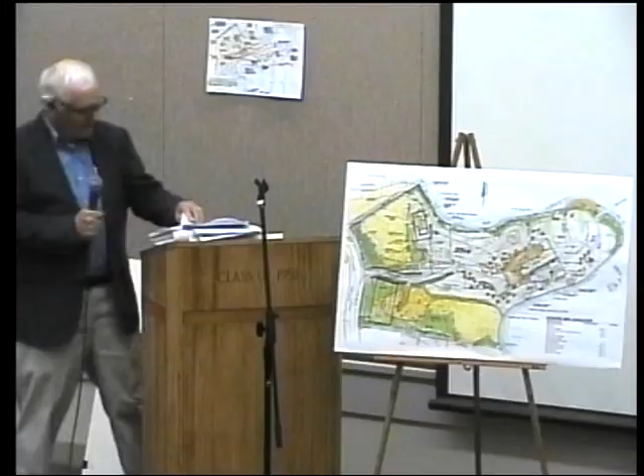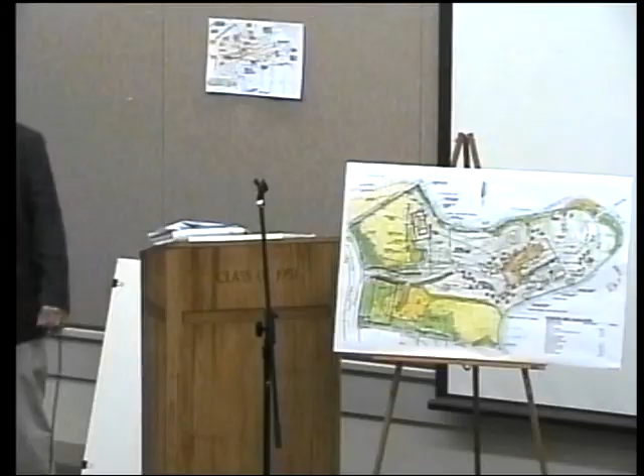I'd have to go back to the first nitrogen loading calculation, right? I did measure that, I don't have it here. I know you had the calculations for the nitrogen from the septic. That nitrogen loading calculation is the measured area of lawn, and what it generates, how much nitrogen the lawn itself generates into the system.

Now, out here, it's not going to be the same as a lot in Hatchville, in that the topsoil out here is very thick. We're talking about...

It's been a long time since I dug a test pit, but my recollection was close to... Couldn't have been that long, because if I'm looking at the septic, let's see when you did the perc test for the septic. I did that in 2005. No, I did that before, 1990-something. And the test pits were in the cul-de-sac.

Yeah, I actually described how I did test pits all over the place, and how they're all impermeable. You asked me for copies, I looked, I could only find one. But it was done by an engineer who, in those days, could just put down material, but he wasn't a soil scientist, so I didn't think it was very valid.

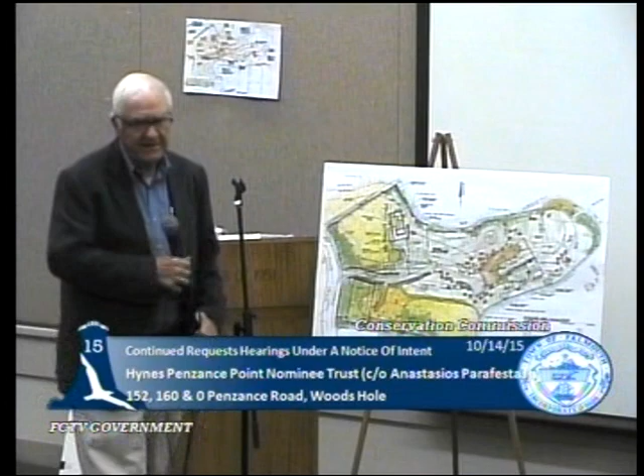So on what page is the perk test? There's no perk test because we didn't have to do one, since we're tying into a soil absorption system that's already been sized under the current Title V. I didn't have to do any more perk tests.

Okay, so you're not even curious about what's there? All right, I know what's there, I saw it. Well, when you dig it, you'll find out. No, wait, I saw what was here. There's sand under this, this is the only sand in the whole peninsula. Okay, well you just told me there was all clay there.

I don't have it in the file, but I'm sure it is. Okay, I'm sure we can get them from Holmes McGrath. All right, I'll make a note.

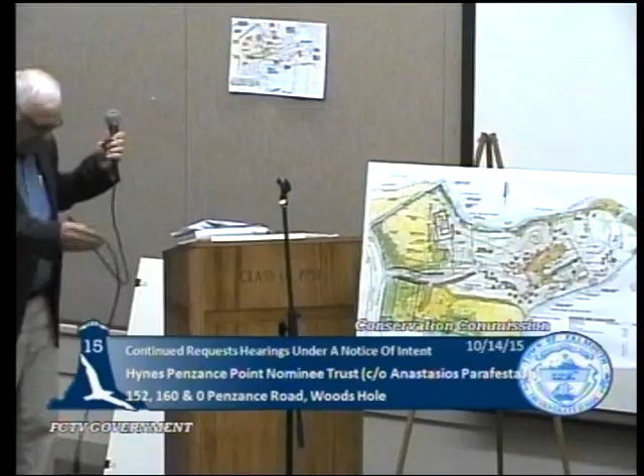You do know, Mike, after I've been out at that lawn, that we have a bylaw in this town that there's no irrigation or fertilizing within a resource area in the town of Falmouth. That's a brand new bylaw. I just want your client to understand this, so that when we make our findings and deliberate, they're not shocked that it can't be fertilized or irrigated anymore. And actually, you proved a point, that by not irrigating it, it stopped being spongy, so that's a good thing.

One kind of rub I had, the biggest one really, is the entire pool is in the Falmouth Wetland B zone. So I don't remember us ever permitting pools in it. I mean, yes we have. I take that back, no you have, because we have, out on Chapoquoit Island, a whole bunch of them. So all right, it still bothers me.

And what is the depth to groundwater at the bottom of that pool? The groundwater is at approximately 2.5. All right, well actually in your septic you said it was at 1.3. Which I don't know how you found out, because there's no perk test, but the septic detail states observed groundwater at 1.3.

So which is it? Because the scuppers, I would say, looking at the water you just said is coming from the ground and going out through the scuppers, the scuppers are discharging groundwater, am I correct? That's what you stated? Yes. Okay, and I bought that scale.

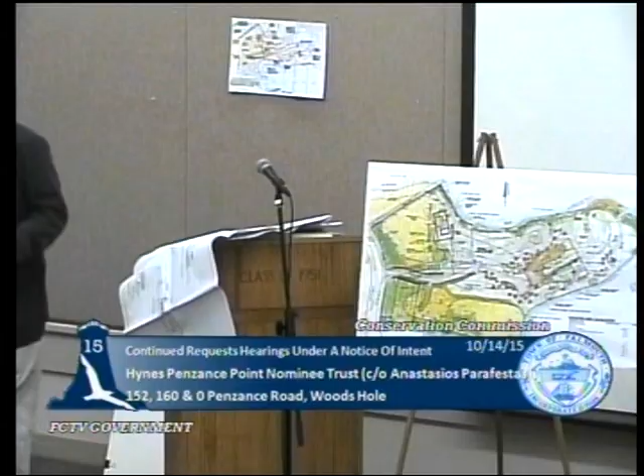And we need to know what the depth to groundwater is for all your dry wells, so that you're not putting the dry wells in groundwater. Or the pool. Or the foundations. I'm pretty sure the spa's going into groundwater. I'm sure the foundation is gonna be too. That's why I asked about the dewatering.

Yes, the bottom of the spa scales from this to be elevation 2. I will adjust the bottom of this spa so it's above the groundwater.

When we did the perk test in 1997, we found sands in here. Okay, so there is a perk test on file down at the Board of Health. Yes, in 1997, there's sands underneath this area. Everywhere else was compact.

Mike, what was the date of the perk test? I don't remember. Well, you said 2005 and 2007, so it's somewhere in there. No, you just said 1997 is what you just said. I believe that's when it was. Now it's 1997. Okay, thank you, all right. It was when the trust bought it.

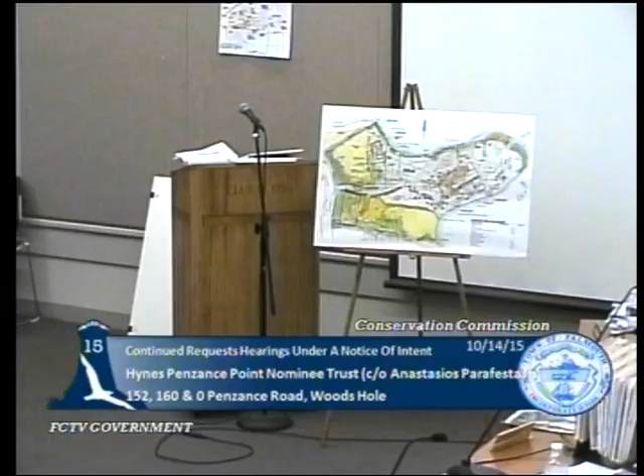Two questions. The first has to do with the curve in the driveway. Originally, the driveway stands between two wetlands. So you're curving it on top of one of the wetlands? Correct. Is that just so people driving by don't see his house? Correct. Is there a possibility of putting plantings in instead, so people driving by in the summer don't see his house?

If you stand here, the driveway is a straight shot. How about curving it up instead of filling that wetland? Currently it goes between two priority wetlands, and instead of restoring habitat, I don't understand why you'd put it on top of a wetland, given the sogginess that's already there.

How many people are out on Penzance Point driving by? You should be able to put some plantings in that would give him privacy. I don't know how... we have to put some kind of curve in it in order to do that. You don't have to, your client would like you to.

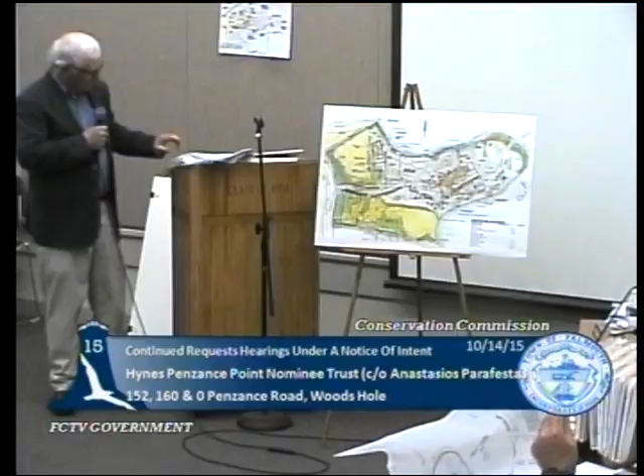Okay, but now we know. Thank you. Well, my intent was everywhere there was- I don't want intent, Mike, I want it on a plan. It is on the plan, it's how you interpret it. The intent is that there be a mulch bed the whole way along the edge. If you want me to, I will revise the plan shortly.

Can I just ask, that's very informative, but is there a landscape plan for this lawn, the Falmouth-friendly type of lawn? No, I have not filed a new plan because the only thing we have filed shows the specified plants in the new buffer area. I haven't shown any other plans, and I've never been required to show a landscape plan on existing conditions.

You realize that's 1984 science. Well, you referenced it, Mike. You said you used it, Mike. I used the formula, but I didn't use some of the values. Petrovic has got quite a paper about the thickness of topsoil, I've already read it. But that's not the one you said, so just get that one.